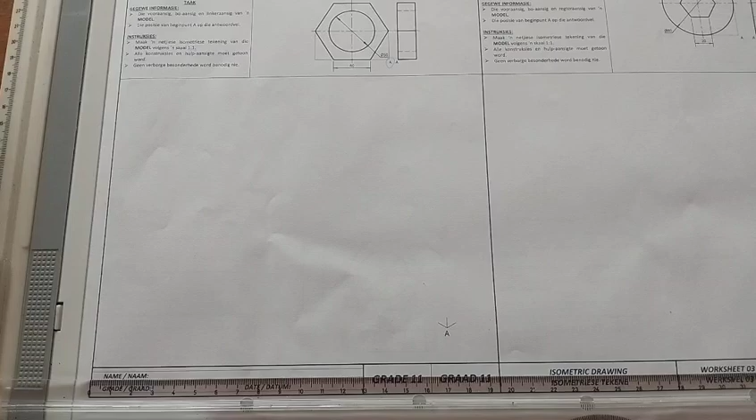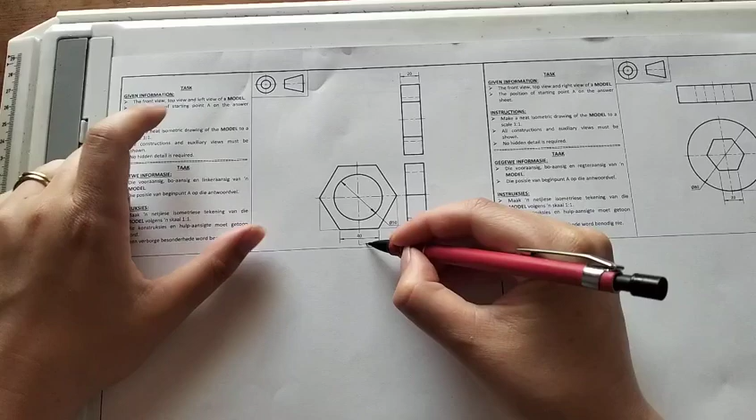Okay, so I'm at chapter 3, page 3, the grade 11 book, HSE. Okay, here at the instruction or the given information, they give you the front view. Okay, so this is the front. They give you the left view, so this is the left, and then also the top view, so this will be the top view. Okay.

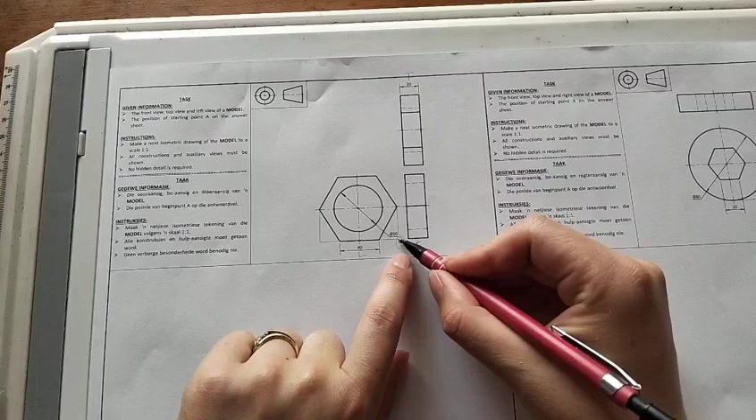The position and the starting point of A. So we can also go and look. Here is the left view, the front view. So this will be front, this will be left, and then the top. Okay. So if I look at A, then I'll know that everything to the left of A, this side will be over here.

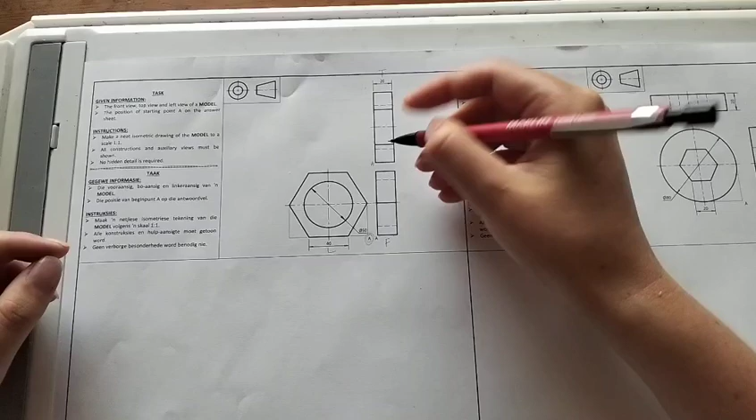And if we look at this part, A, this will be to the right of A, so it means that it will be over here. Okay, so we can also go and put A on our top view to know this will be to the right of A, this will be to the left of A. So if we look at it like this, where we see actually A. Okay, so to the right of A, to the left of A, because this is our top view. Okay.

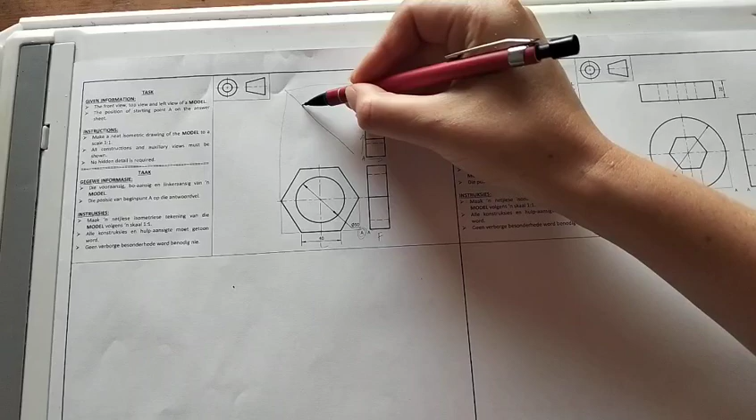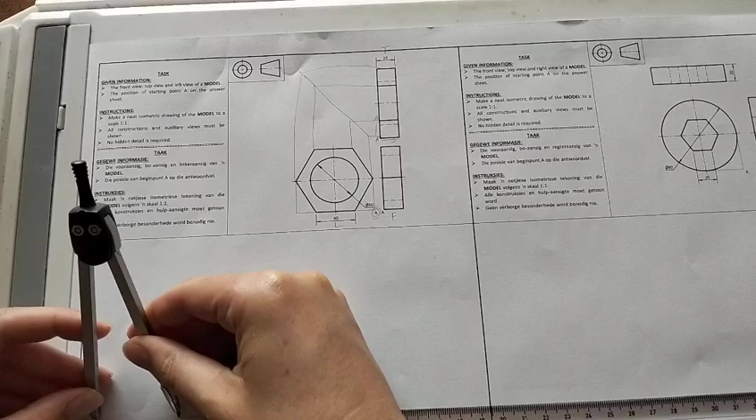So we can also go and put our 45 degrees line there to know which line is which one, to see from the top. See, okay, that is how I'm gonna see it. Okay, so let's start by first, if we get any polygon, then we have to go and draw our auxiliary view. So I'm going to start again by using the measurement, which is 40, which they give us, and I'm going to draw a circle.

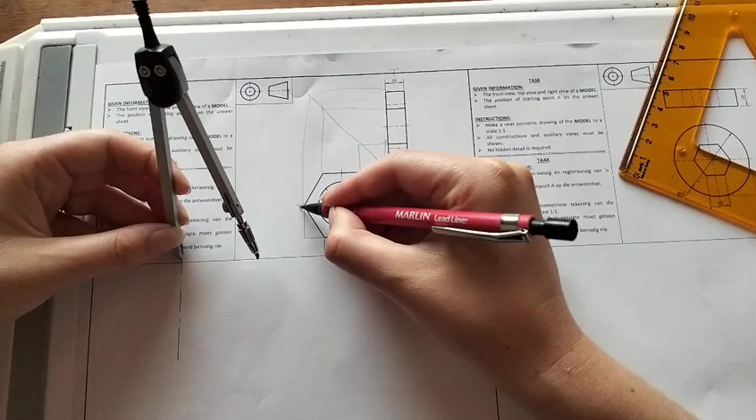So I'm going to draw my auxiliary view. So my hulpaansig gaan ek sommer hierso teken. I'm going to make this my center line, and I'm also just going to draw half of it because it's unnecessary to draw the full one, because I only need like this. I just need this distance. That's the one I want.

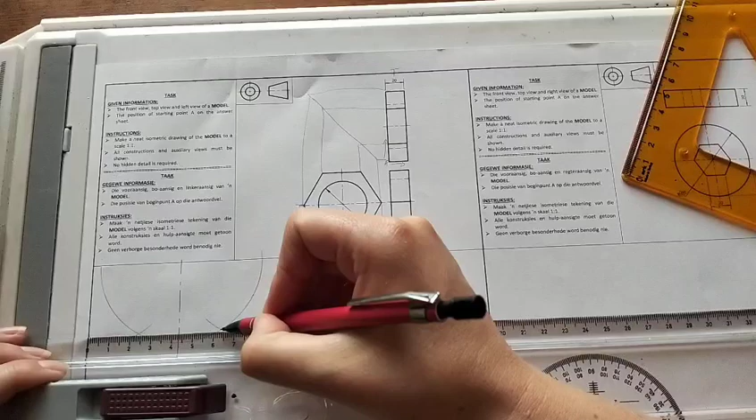Okay, so my compass is on 40, and I'm gonna draw a half circle, and then I'm gonna put it on this point where it's on the center line over here, and I'm gonna cut this half circle off at that side, and I'm gonna copy it and do the same on this side, and then I just have to connect everything. We'll also see that from here to there, this will be 60 degrees as well, and the same on this side.

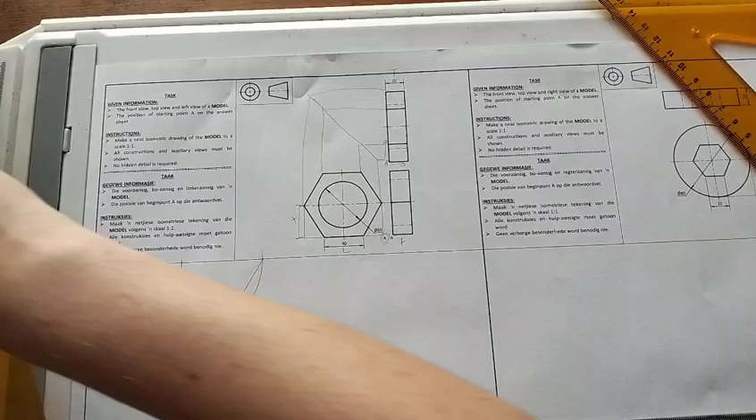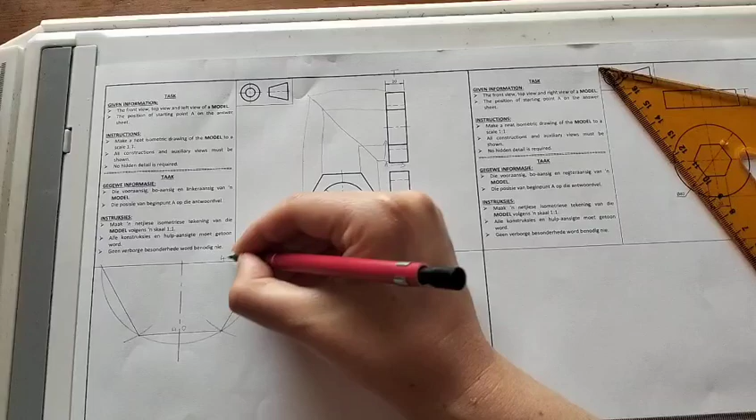Okay, so now that I have my auxiliary view, I can have my hulpaansig geteken. So this will be 40 from here to there, because that is what they give us, the 40. Okay, so we know that if this is 40, it means that from the center to the sharp corners over here, the longest corners, this will also be 40, because that was the radius of the circle. So 40 on the side and 40 on that side, so it means it's 80 in total.

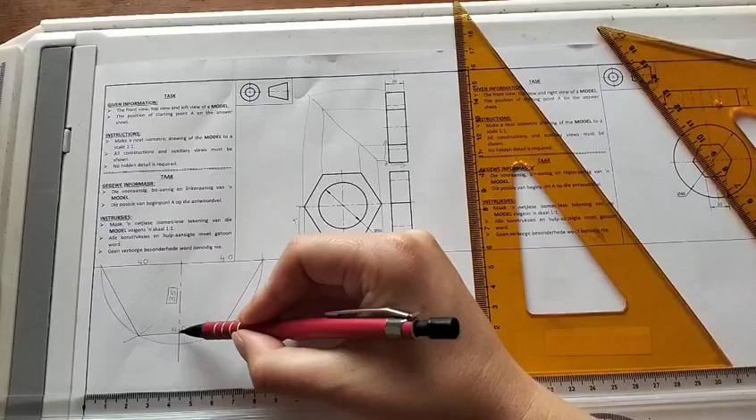But if you look, the radius is 40, so it means that to the flat side, this will be less than 40. So that's what we wanted to go and measure. So if I'm measuring it now, I get 35. Okay, so that is the distance I wanted. So from here to there, that is 35. If you're out or I'm out by a millimeter, it doesn't matter. You have a millimeter tolerance range, so that is fine.

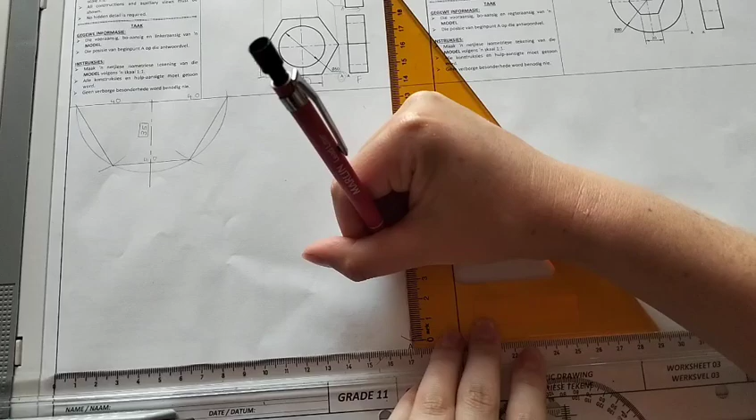So now I can go and draw my construction line to start with the hexagon. Okay, so I'm gonna start with the vertical line. I'm gonna measure 35 upwards and just make a mark on that line to know that will be the center, so it will be the center line. And then I'm gonna measure another 35 upwards, so this is 35 and another 35. Remember, this is our left view, which I'm drawing now.

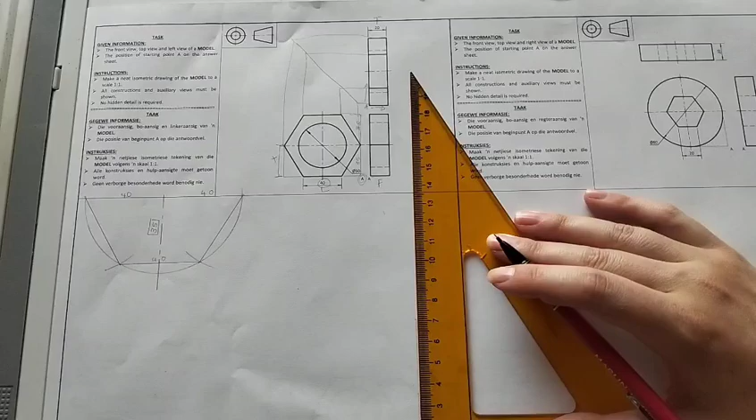So from here, another 35, and then I know that is the total, so our total length will be 70 millimeters. Okay, so I'm going to draw just another construction line here.

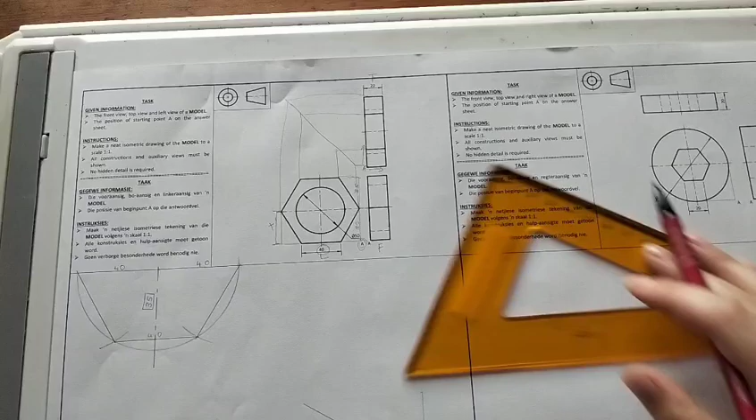I'm going to draw a center line. Remember, you have to draw all the center lines they give you. So you have to draw in this one, that one. This is the circle's hidden detail line, but you have to draw all the lines, okay? And then the top one.

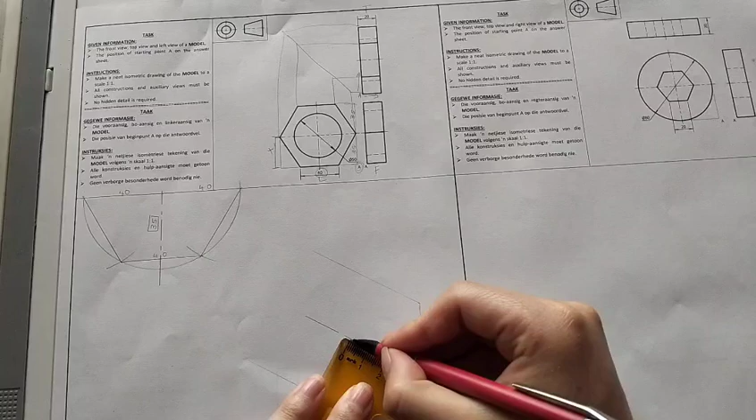Okay, and now I can go and measure, because this is where the sharp corner, the widest part is of the hexagon, and it means that it will be 40 till the center. So I can measure 40 inwards and then 40 again, so it will be 80. And again 40. Okay, and then I can draw my center line for this one as well.

Oh no, I hate it if that happens. Okay, but anyway, so there that is.

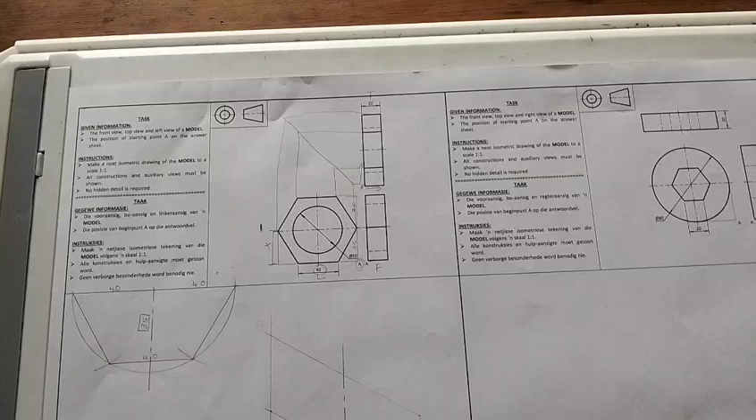I'm also gonna draw my construction line just to stop the square. Okay, so there I have my guide to draw the hexagon. I can also go and draw the 20, which they also give us at the top. So the 20, I'm gonna draw in the thickness as well.

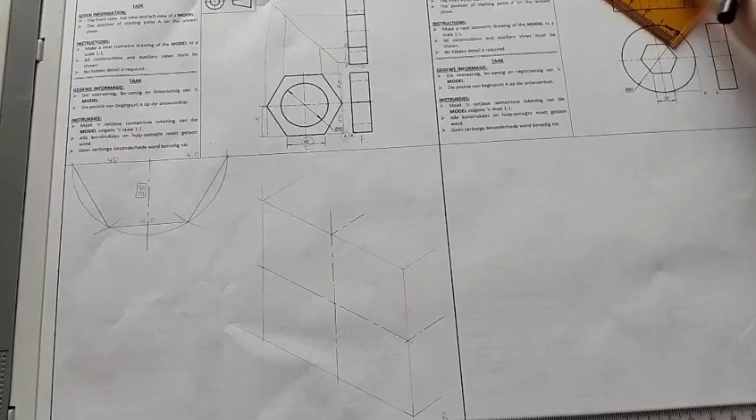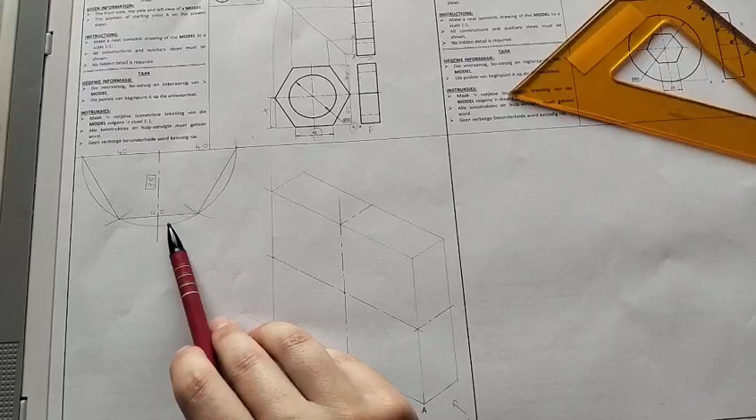And this will be a center line and a center line again. Okay, and I'm gonna measure on any one of that 20. Okay, so there I have it. Now it's very easy. I just have to go and measure from my auxiliary view to get the hexagon.

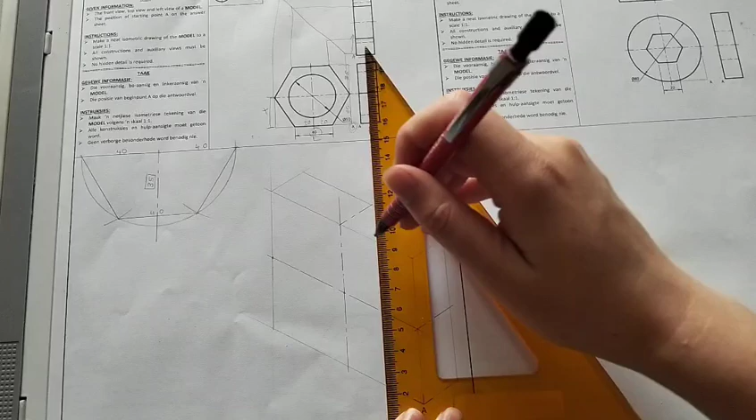So I know already these are the two sharp corners, which is these two. So I just have to get this, and I know this is 40, so it means that this will be 20 and 20 from the center. So I'm going to measure 20 to each side. And instead of just measuring it at the bottom as well, I don't even have to draw a construction line, I'm just going to copy it like that. Okay, and now I can go and connect it.

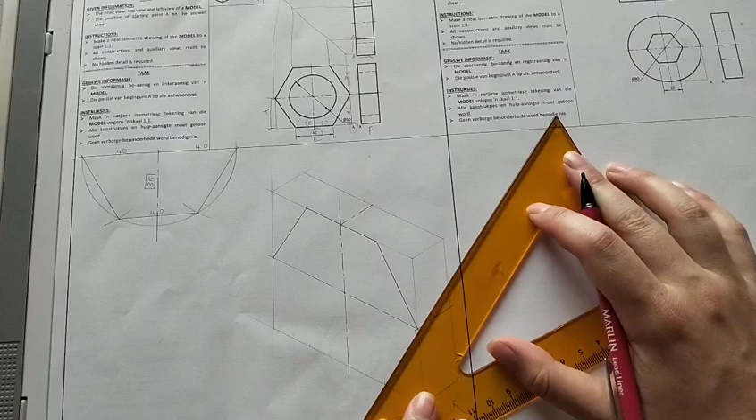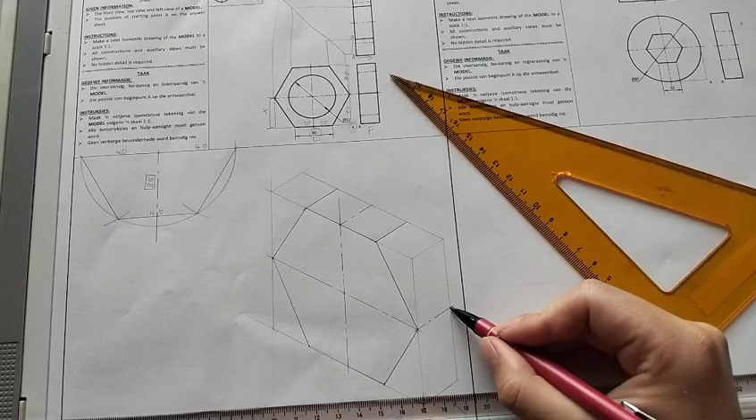Okay, so now I can just go and put in the thickness. So I know that this corner will go to this line, so I'm just gonna go draw it straight through, and the same on that side. This one as well, it stops there, so I'm just gonna connect that. And now this will be actually an edge, so I'm gonna have to, yeah, just excuse that now.

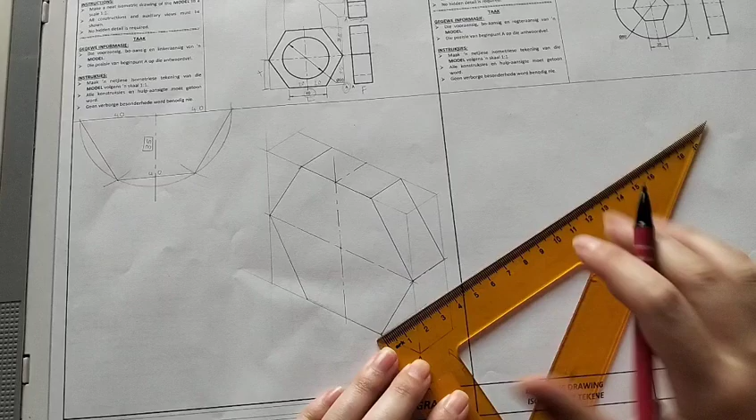Okay, and for this one as well, I'm also gonna see this, so I'm just gonna measure 20 on this line as well. Okay, so now that is where it's gonna stop, and just connect that part. Okay, so I'm finished with my hexagon. I can just go and darken all the lines which must be darkened.

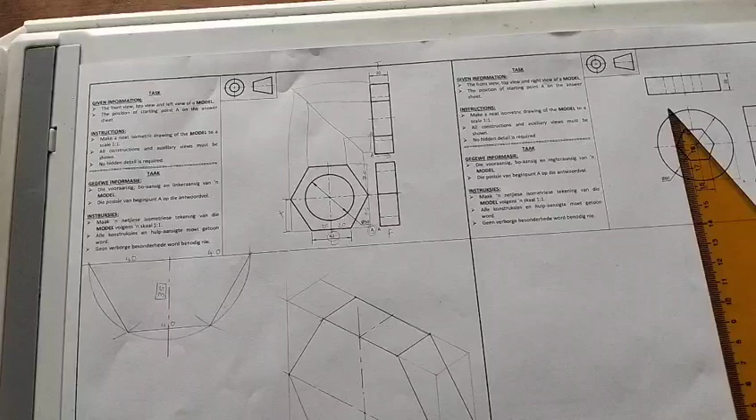Okay, then we have to do the circle. The circle is, if we look, it's 50 diameter, so it means if I'm measuring from the center, I'm going to measure 25 to each side, and 25 upwards and downwards as well, so I can get a perfect square.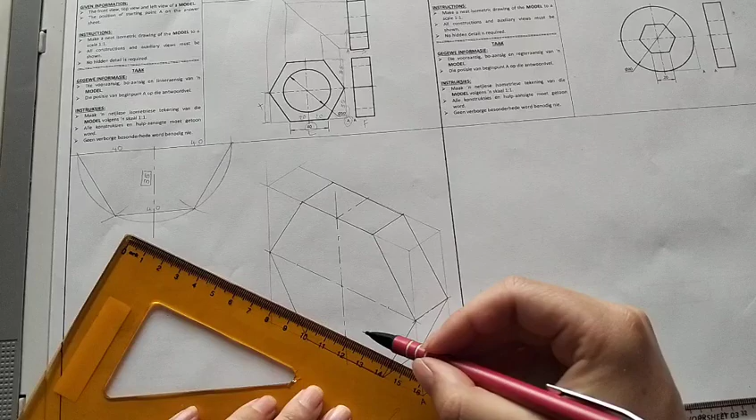Okay, so I'm gonna draw my square with my 30 degrees again, because this is an isometric drawing, so everything must be with your 30 degrees triangle. Okay, so there's my square.

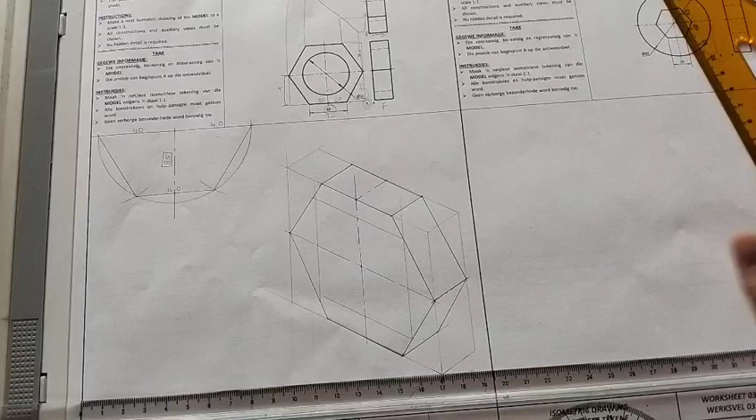And what I also taught everyone in my class is that if we look at where the obtuse angle corners are, it's that one, die stomphoeke, and that one. So I have to get a perfect V out of that. So it must be a perfect V like that.

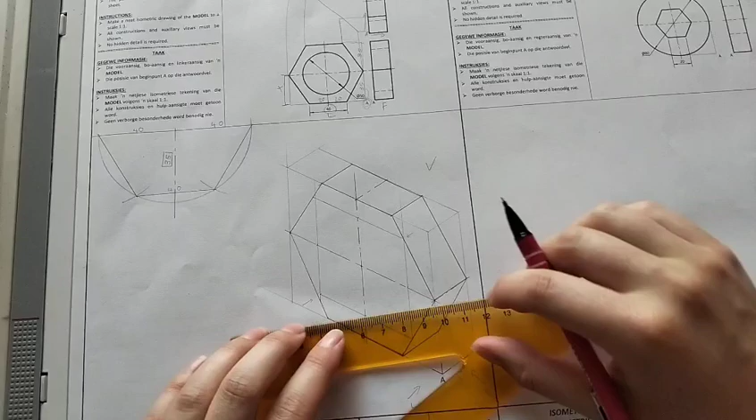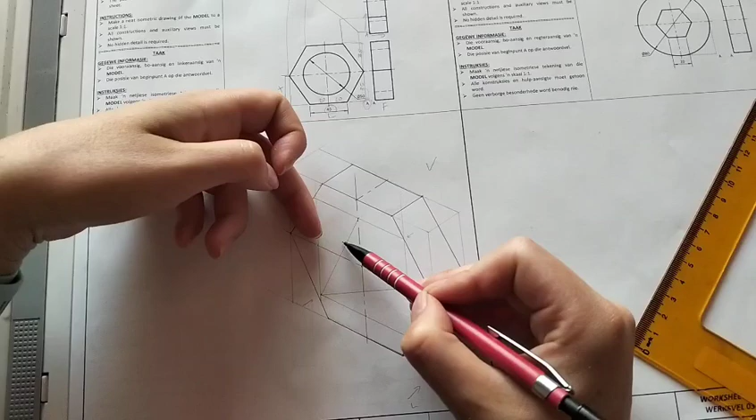Okay, so it means that if I'm drawing it from this corner, I can go and draw a line to this middle line and to that middle line. Okay, like that. So can you see it's a perfect V? Okay, then just a tip, you can either do it again from this side and then you'll get your cross over there where your acute angle corners are.

Okay, but you can either go with less construction, just draw a line straight from this acute angle.

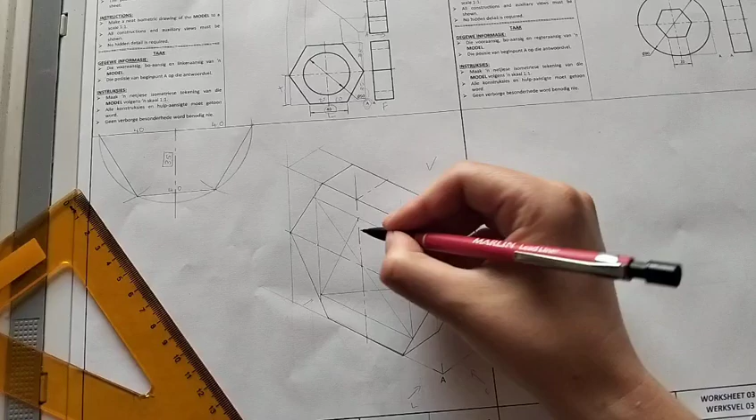Draw that line, and that means that will be your center, and that will also be your center. So that is much less construction, and remember that your construction can also be a lot lighter than mine. I'm just drawing it like this so you can see more clearly.

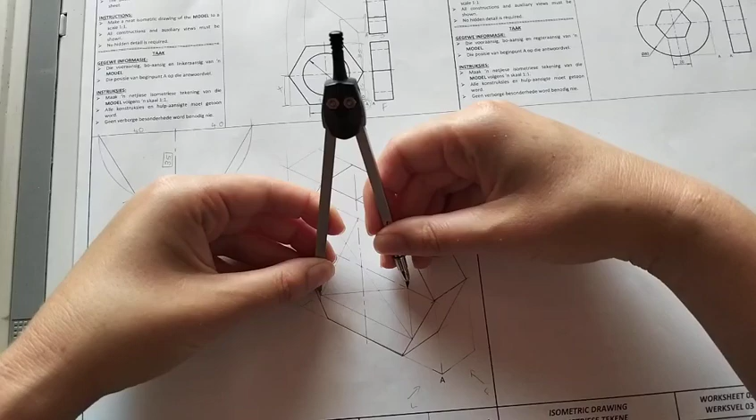Now I'm going to put my compass on that point and extend it until where the square ends, where that V stops. So my arc should be between the lines of the V. So there it is.

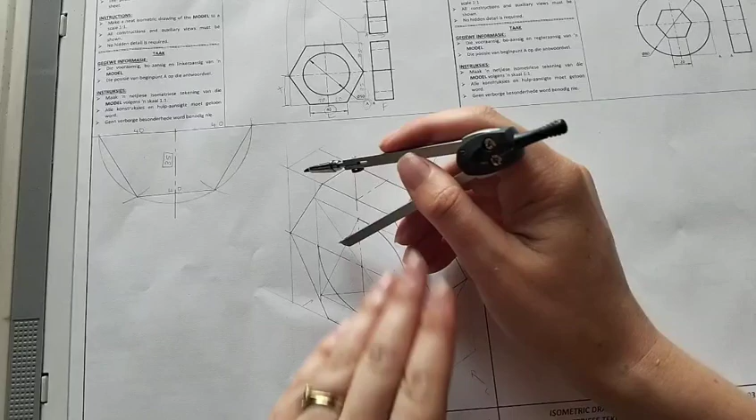The same on this side. I'm putting it on that corner, and then the center. Just make sure that it touches both sides, and it will. Okay, and then the same on this side.

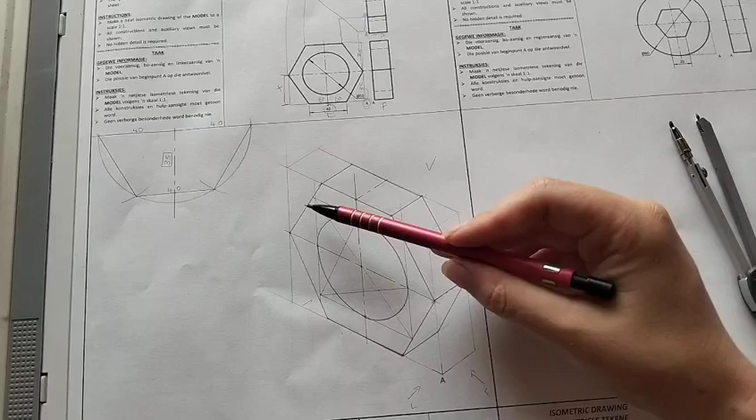Now we have the front circle, the one on this front plane. So we have to show the thickness. The thickness is 20 millimeters backwards. So we use this corner to get this arc.

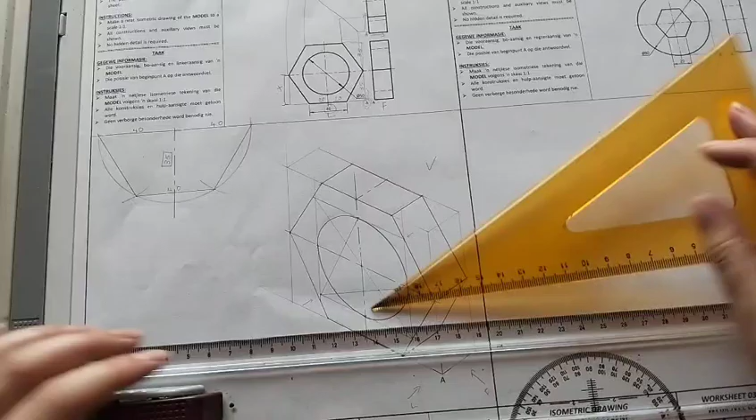Instead of copying this whole square at the back, which would be a lot of construction, I'm just going to take this mark which I used for this arc and draw a line backwards 20 millimeters. So that is my construction, and I'm showing it now. On this line, measure 20 millimeters back. So there that is.

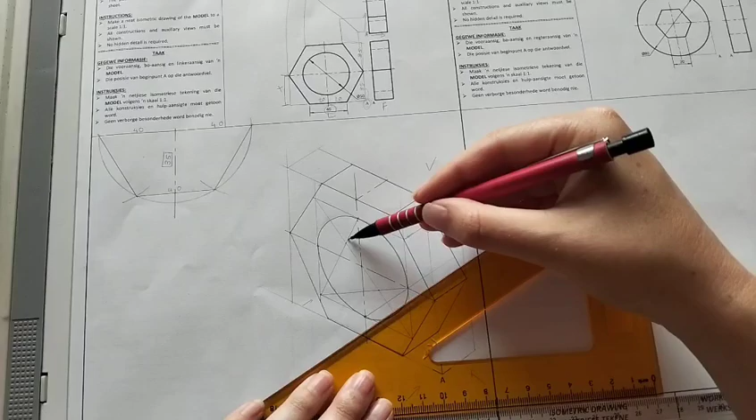Okay, and then where your arc stops - my arc stopped here, and I'm going to measure also. I'll draw a construction line so I know that from here my next arc will have to stop on this line. The arc should go between these two lines.

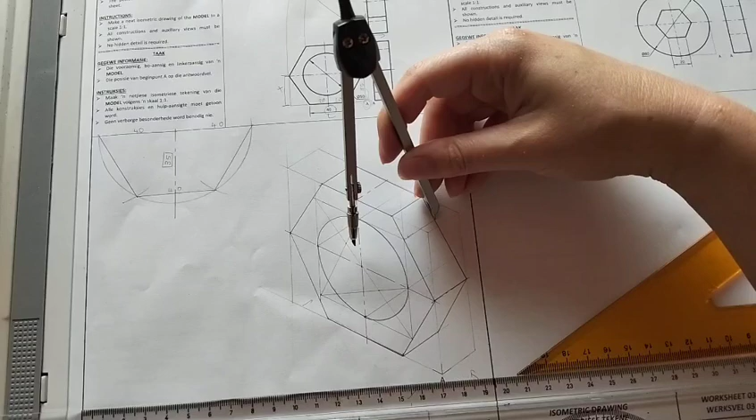So I'm going to place my compass on the first mark again, and adjust it until where I drew that arc. Now I'm just going to take it back 20 millimeters, and you can see now I know that my arc should go from this line to that line. Okay, and you can go and draw your arc.

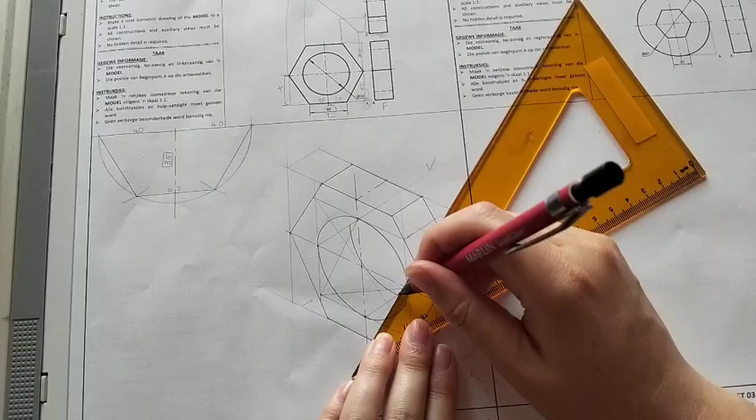This is just construction, you don't have to make it dark. Then I just have to show that from this mark where my line stops, I have to draw a construction line to show that was my center point for that arc. You have to show this, because you're not showing the square at the back, but you have to at least show this to get your marks for your construction.

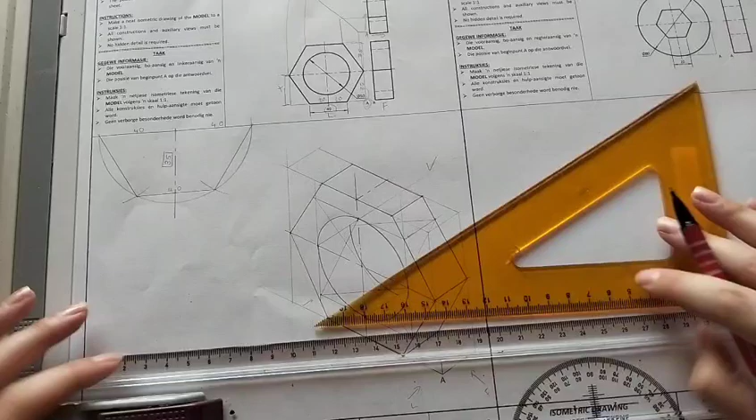Then I'm going to do the same for this arc which I've drawn. Remember, we're drawing this part again at the back. For this one I use this center point. I'm also going to draw a construction line and measure 20 back. So that is my next center line for the next arc.

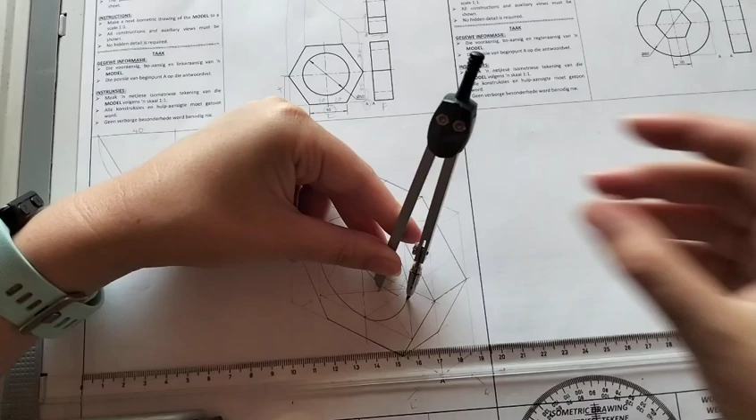Again, I'm putting my compass on the one I used for this arc to draw the circle, that one, and now I'm just taking it back 20 millimeters so I can finish that arc over there. I just ruined that part now, but there it is. Okay, and then the same on this one as well.

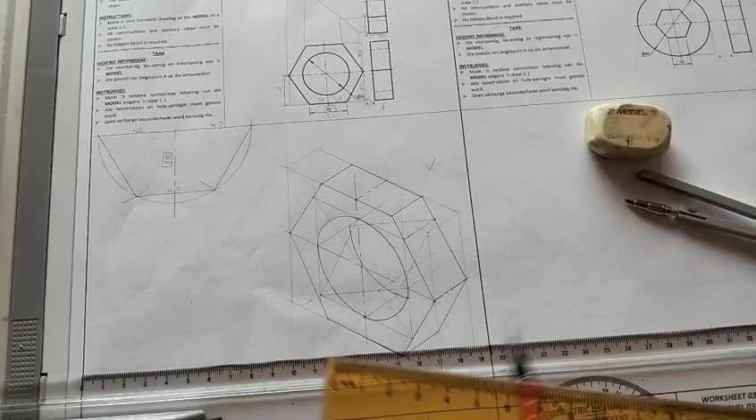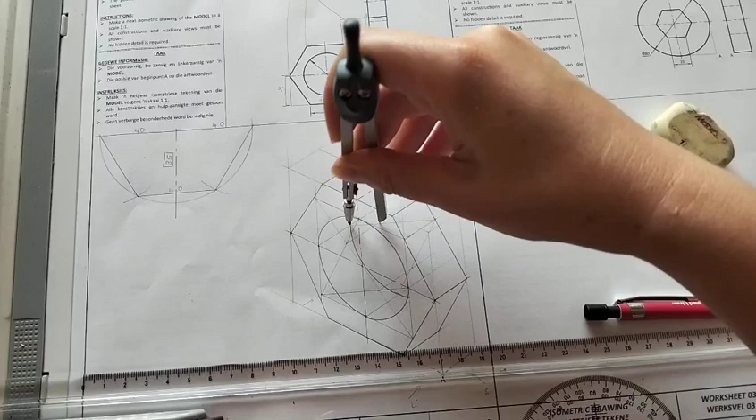So for this arc, I used this mark as the center. I'm also just going to draw a line backwards and measure 20 on it. My compass is already on the same arc radius, and I'm just going to place it on the new mark and draw that part of the arc. How's that? So then your arc is finished. Your circle part is finished.